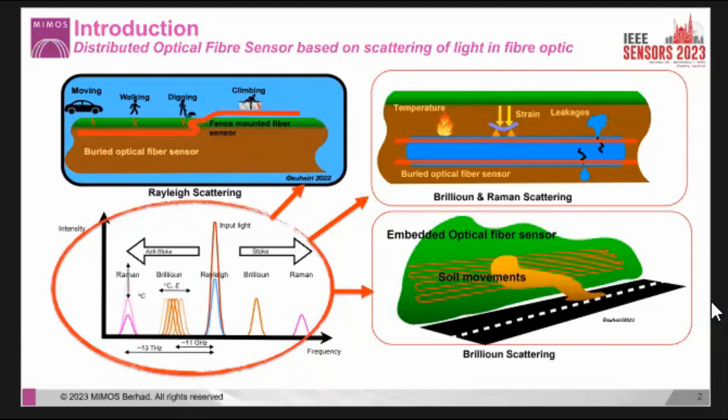In our lab, we are investigating the use of this kind of fiber for applications such as third-party interference, illegal digging of telco infrastructure, pipeline leakages in oil and gas, and power cable theft. If you have power cable with optical fiber embedded inside it, you can use it to detect this. In our country, we have a lot of this kind of problem - people cut copper cable and sell it for a good price. Another issue is soil movement along highways. These are among the applications we are investigating.

The issue with testing optical fiber sensor is that sometimes the work is done only in the lab, so you could not really understand the actual behavior of the sensor. In particular, if the fiber is already installed in a manhole or critical infrastructure, it is exposed to stress, temperature, and weather. So it's important to have a setup where you can deploy the sensor for continuous data collection, characterization, and optimization of the system.

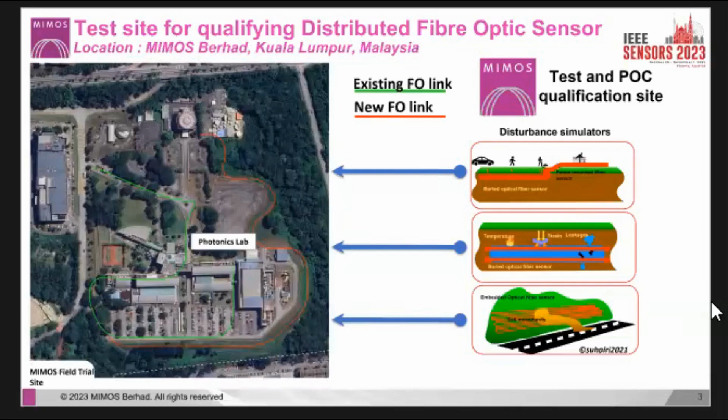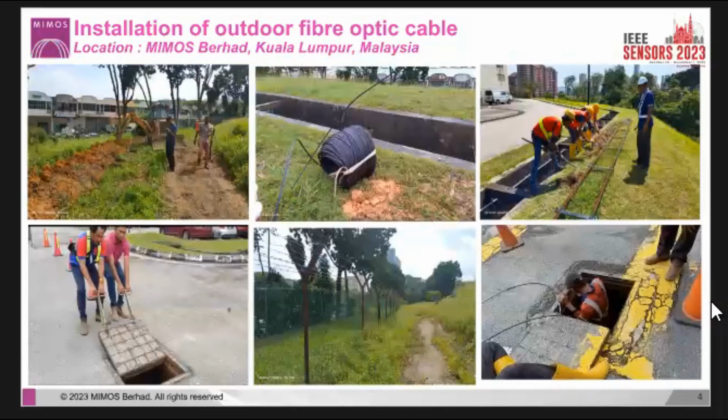So we have invested within our campus so that we can control the environment for this kind of testing in our office. These are some pictures of the installation done below the ground and also on the grassland in our area. This is the standard single mode fiber being installed, and the length of the fiber is about 1.2 kilometers inside the campus. Again, these are people running in front of our lab.

Now this is our lab. There's a fiber optic installed on the floor.

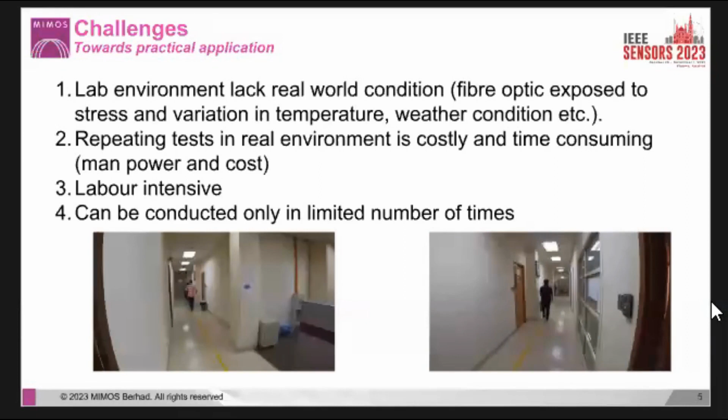Again, as I mentioned, the issue of taking good, continuous data and a lot of data is manpower, cost, and time. We had to engage our friends in the lab, who should be doing more valuable things in their work, so we could only perform this kind of activity for a maximum of about half an hour. So it's not productive in terms of doing work. We think there should be another way of doing things so we can actually get a lot of data for characterization.

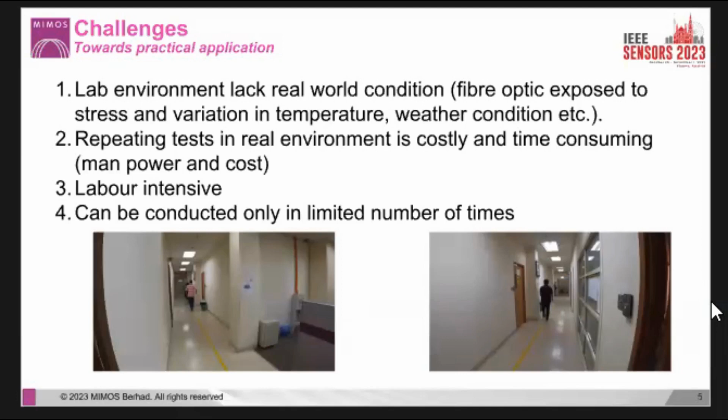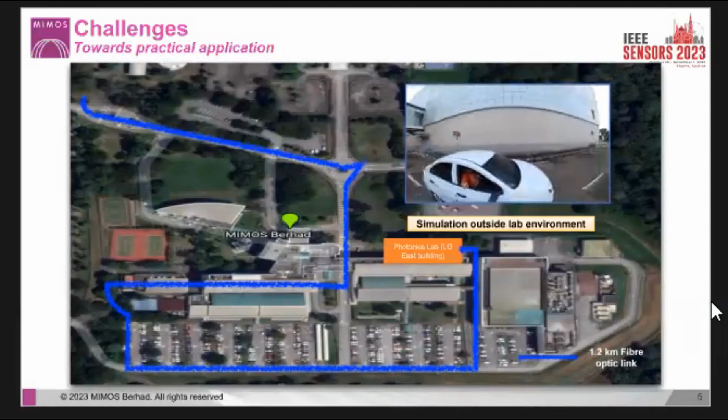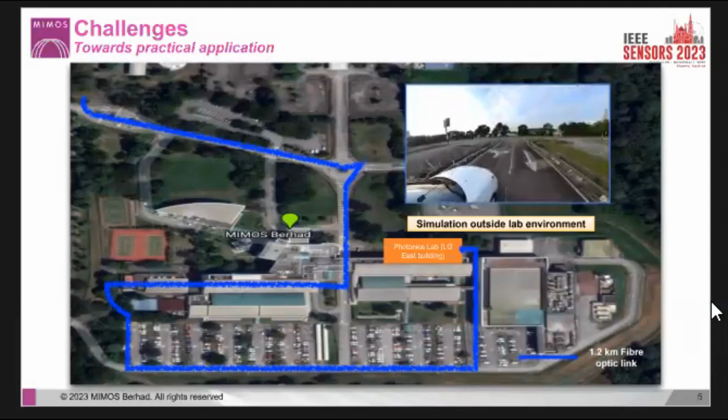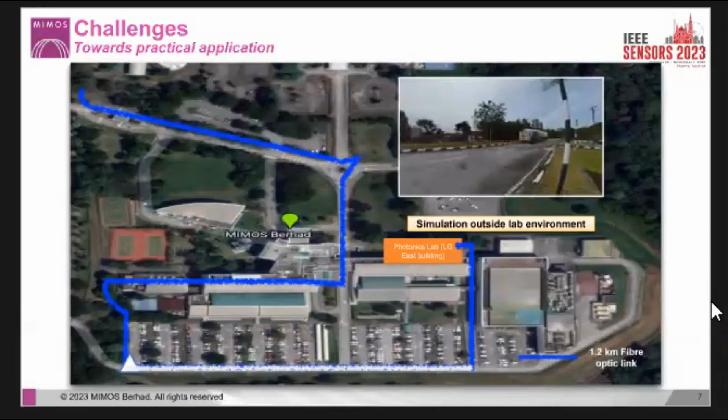Another example of labor-intensive work we are doing is testing the optical fiber sensor under the tarmac for vehicle movement activities. We had to drive and close the road, which caused problems for other people as well. We also tested a tanker passing over the fiber optic under the road, so again we had to stop cars coming in and out. All this created difficulty in terms of doing research.

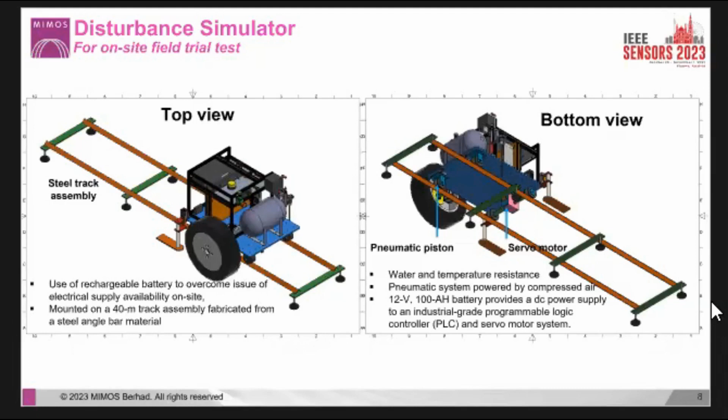So we proposed a simulator. We fabricated and customized this simulator, which can perform several tasks - in this case, three tasks, three events, corresponding to three types of disturbance. This is mounted on a steel track, just like a railway track, and it can move to and fro repeatedly. We can also customize it to sequence step-by-step movement as well.

So this is the simulator, which can perform three events mimicking digging using a hand drill, movement of a vehicle - this is rotation of tires - and also a stepper mimicking the action of people walking. We place this simulator on our test site, and beside the railway track is the optical fiber, so we can use it to sense disturbances. It doesn't need to be close to the device or equipment - it can detect events at least 1.5 meters away from the track.

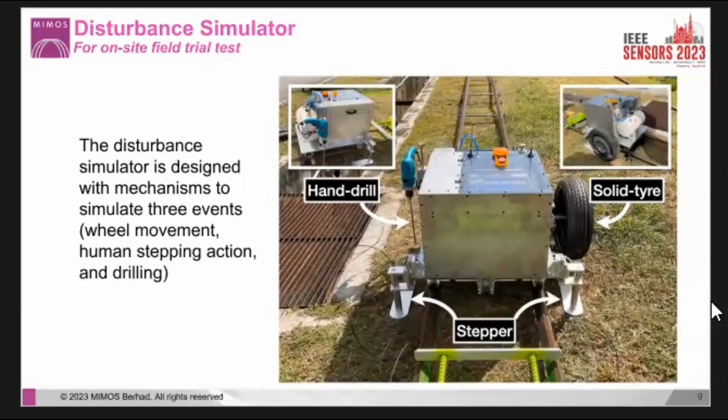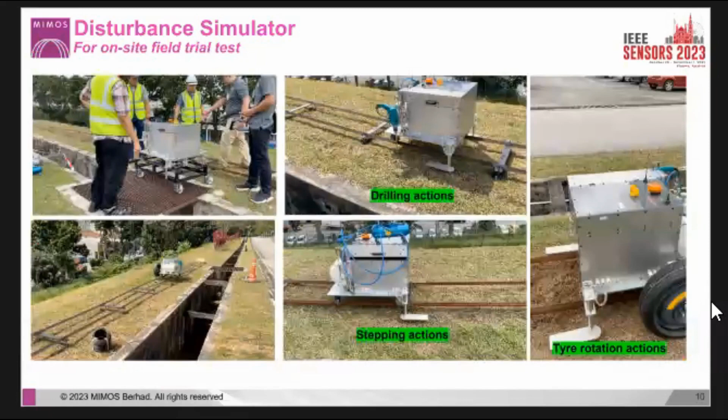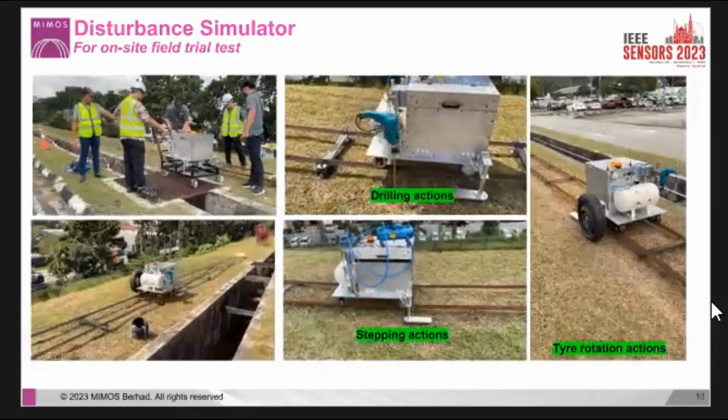So this video is an example of the movement of this simulator. You can see that this is the wheel rotation, the drilling actions, and stepping action, all can be done within this one machine.

It is controlled by a PLC program where you can sequence it, as I mentioned, to perform a sequence, be it a continuous movement to and fro, and also stepping in step. It is controlled by this program, and it is connected to our lab wirelessly.

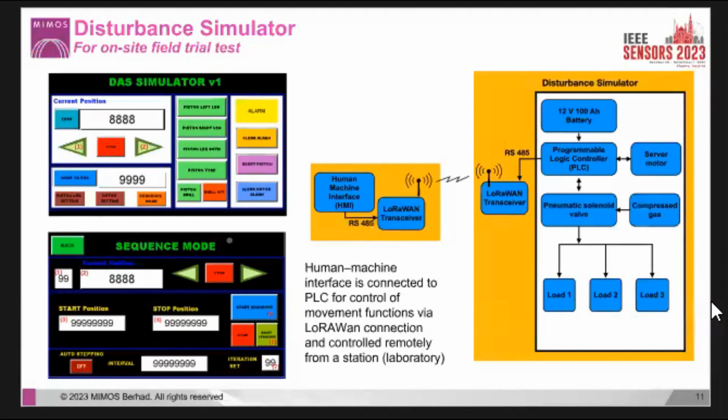So there won't be any people on site, you have people in the lab. The only thing that we still lack is having an eye, I mean a camera on the site. So that's something we are working on. Once we have that, you can totally leave the site without any people, and just work in the lab. Okay, so this is the lab.

Okay, this is the result, you will call it a waterfall plot. In this plot, you can see the simulation of stepping. You can see that this is the stepping simulation, meaning that it's stationary. You can see that there's frequency every time there's a step at stationary position. And this is when the simulator moves while stepping.

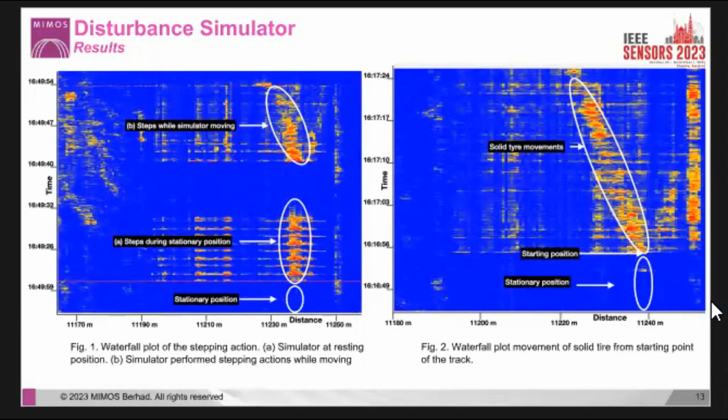Okay, and this one is the vehicle movement simulation. You can see that it is moving from this line of fiber to the other direction. And again, this is at the other end of the railway track, the movement of the tires. You can see that the distance is now different from the at the other end.

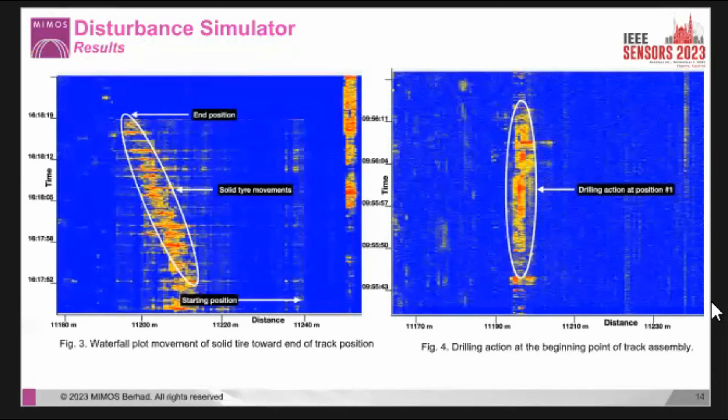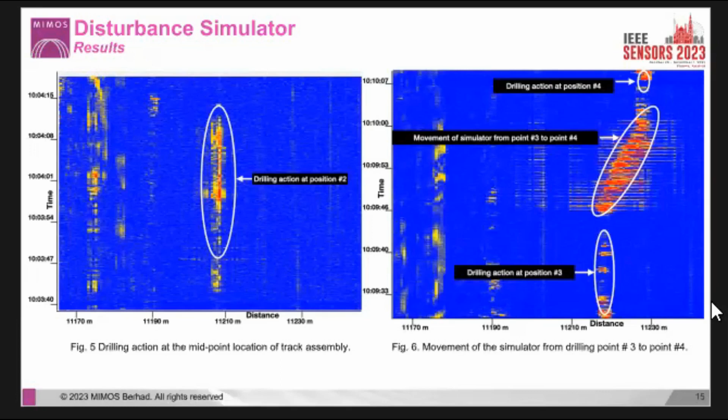So in essence, we have demonstrated the ability to simulate three different events, which is walking, vehicle movement, and digging, which correspond to the actual applications such as third-party intrusion. We also have performed tests on optical fiber at any point along the optical fiber, in this case 11.2 kilometers within our campus.

As compared to a laboratory test where you have to have a simulator, which in this case is a piezoelectric stretcher, you splice it, connect it to a fiber optic, and see the response when you input frequency. If you want to see at the other end, maybe 5 kilometers away, you have to do the same thing, repeat again, cut it and splice it again and again. So we have done the test without doing such a process.

Nevertheless, the test is still at a stage where we require a lot of optimization in terms of quantifying each of the events. For example, the strength of stepping, which corresponds to the weight of a person walking, and also the speed of digging. Because in actual implementation, digging can happen by manual digging or using excavation. So by having a quantity that can relate to this strength of digging, it will also give values to the result that we are doing.